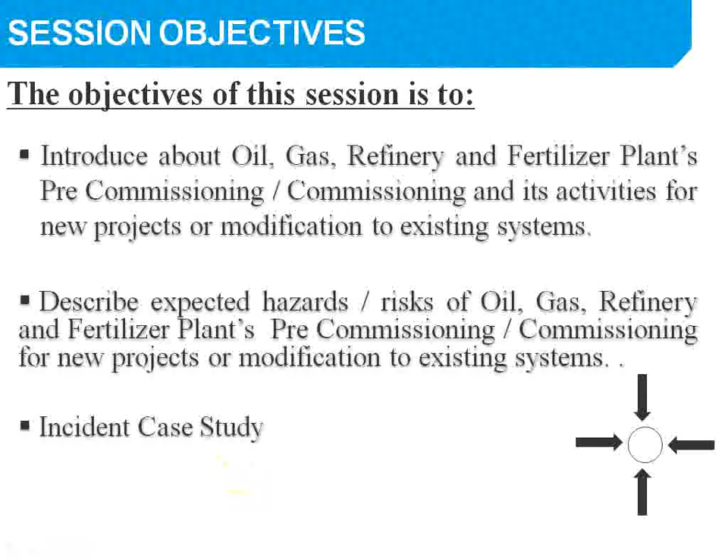As we will see, introduction to pre-commissioning. Definition. Pre-commissioning is the execution of inspection, checks and tests on all individual components within a completed system to verify that they are supplied and installed in accordance with the engineering design, specification and drawings.

Commissioning means those activities immediately following ready for startup, we can say RFSU, including nitrogen purging and operating plant and/or equipment. It covers all activities from ready for commissioning through the initial acceptance.

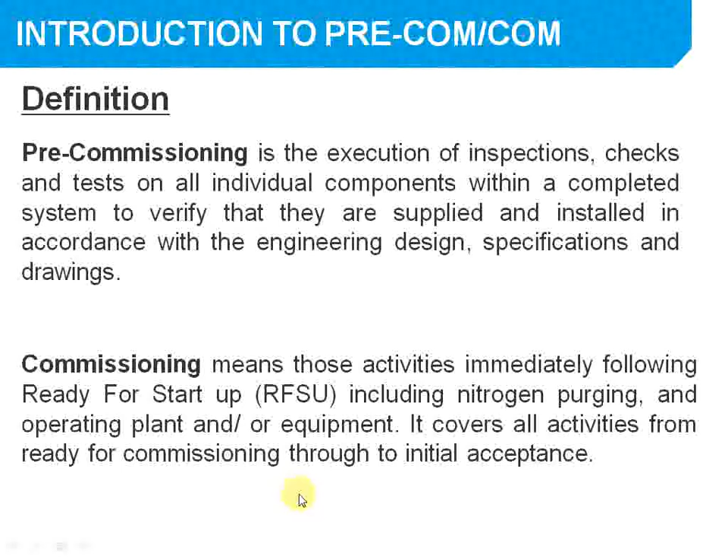Pre-commissioning activities. Pre-commissioning includes all activities required to get ready for commissioning, such as line checking, line flushing, air blowing, water flushing, steam blowing, oil flushing, chemical cleaning, physical cleaning, catalyst loading, loading of vessel internal material, chemical loading, instrument loop test, function test. You can see one picture of line flushing through air blowing, and a second one of line flushing through steam blowing.

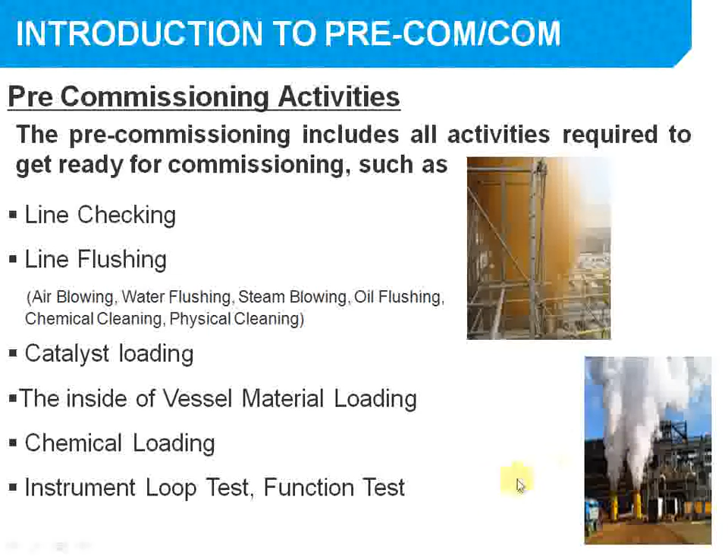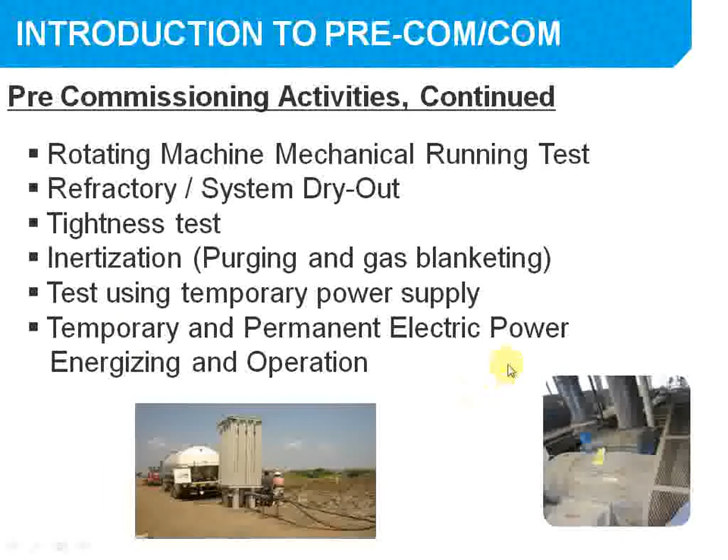Some more pre-commissioning activities. Rotating machine mechanical running test, often people say MRT. Refractory system dry out, tightness test, inertization, purging and gas blanketing. Tests using temporary power supply, temporary and permanent electric power, energizing and operation.

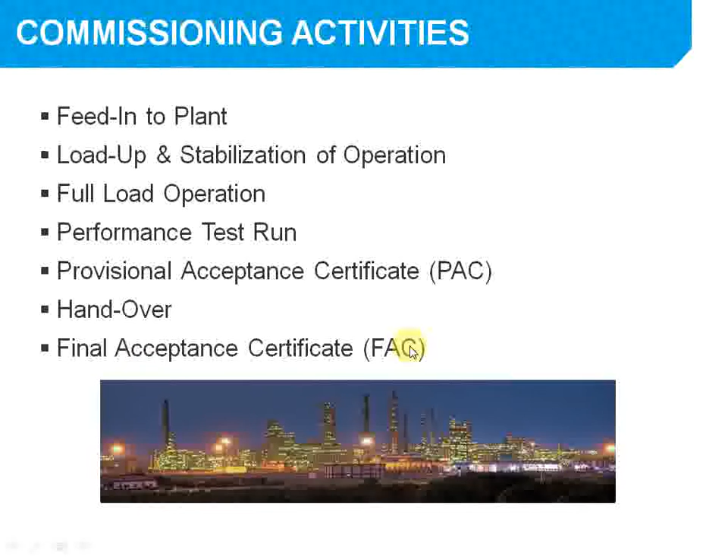Commissioning activities. Feed into plant, load up and stabilization of operation, full load operation, performance test run, provisional acceptance certificate PAC, handover, final acceptance certificate.

Why is pre-commissioning safety important? If we look at hazard and risk, in case any incident happens during commissioning, the consequence could be catastrophic. The nature of pre-commissioning incidents can cause multiple fatalities and huge property damage. Some pre-commissioning and commissioning hazards are high noise level, high temperature, high pressure, high velocity, high voltage, hazardous substances, spills and leaks, or rotating equipment.

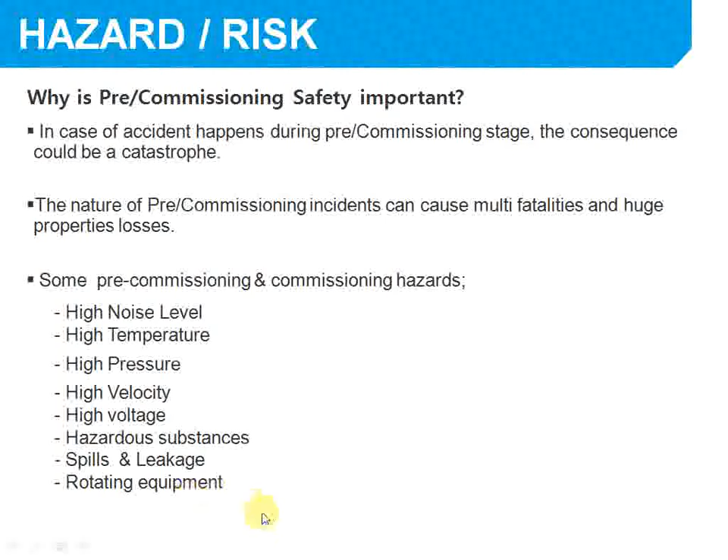If we look at characteristics, the construction phase is static, so obviously hazardous energy will be low for personnel or property. Pre-commissioning is dynamic, hazardous energy medium. Commissioning is dynamic, very high for persons, fire, explosion, chemical or environmental problems.

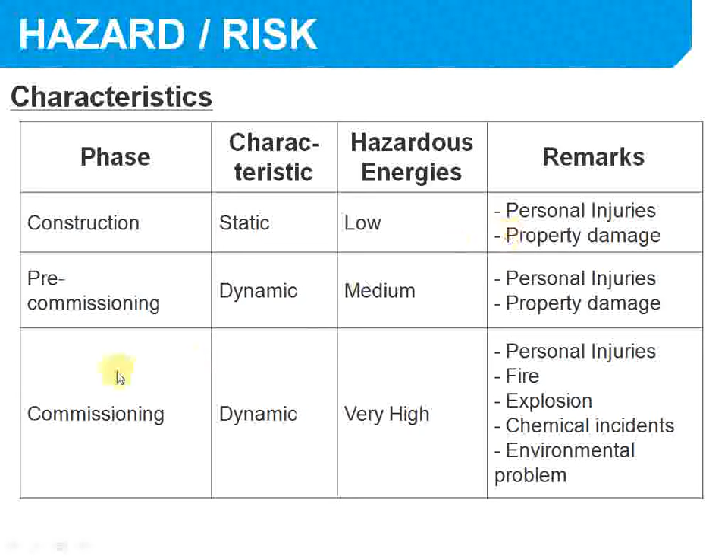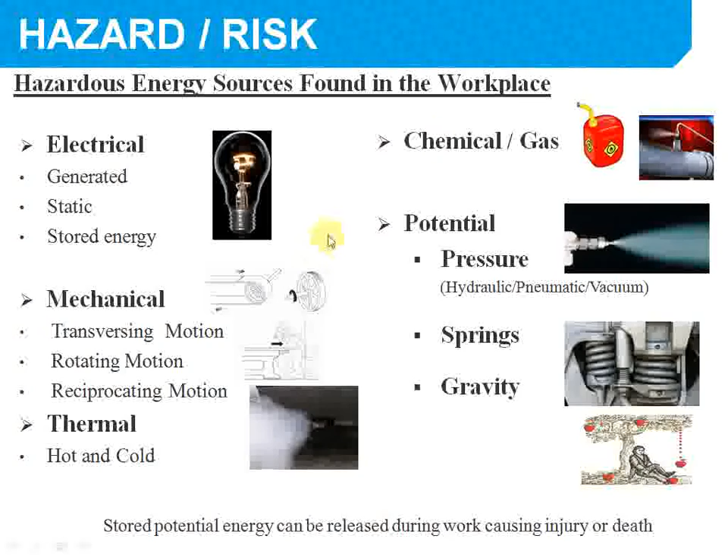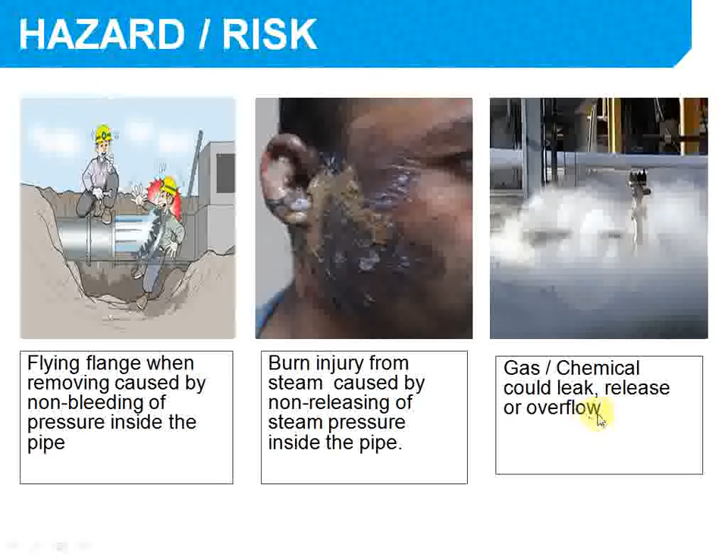You can see these types of incidents due to high velocity or pressure: burn injury from steam caused by not releasing the steam pressure inside the pipe, residual energy, or gas or chemical leaks. Hydraulic, mechanical failure, electrical, or fire and explosion.

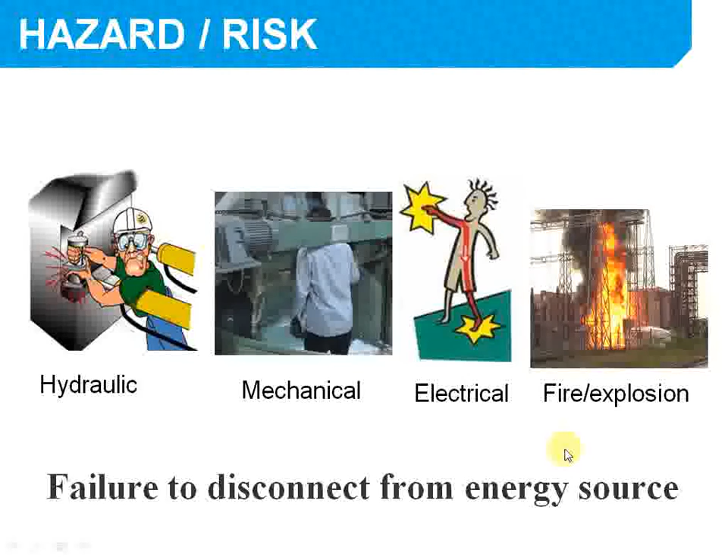Incident case study number 1, gasket failure. A substandard gasket was used, with incorrect installation, and contributing factors for the incident included failure of quality control and commissioning checks to identify the risk. Leak point, damaged gasket.

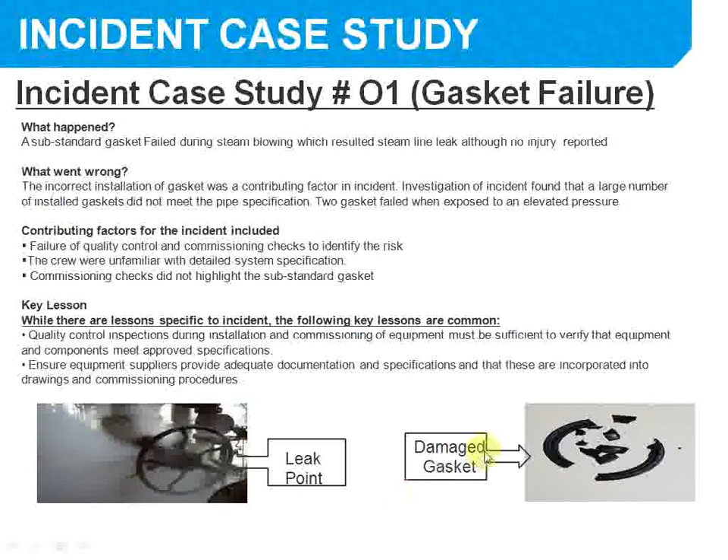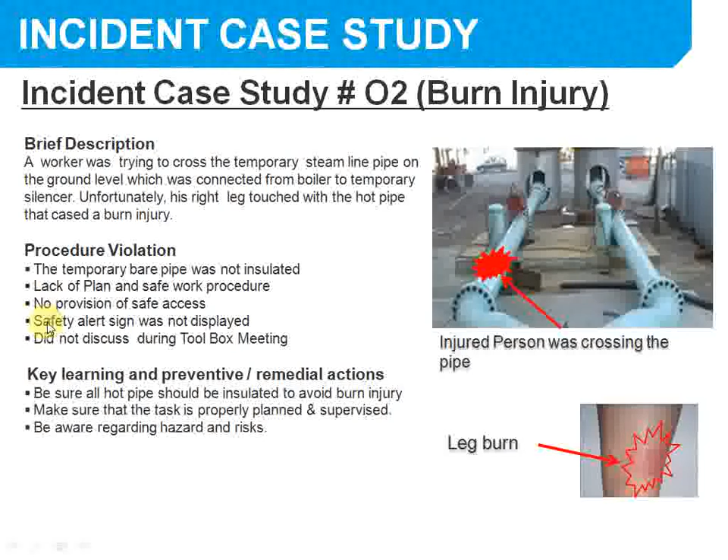This session has covered an introduction to oil, gas, refinery and fertilizer plants pre-commissioning, commissioning and its activities for new projects or modification to existing systems. Expected hazards and risks of oil, gas, refinery and fertilizer plants pre-commissioning and commissioning for new projects or modification to existing systems, and incident case studies.

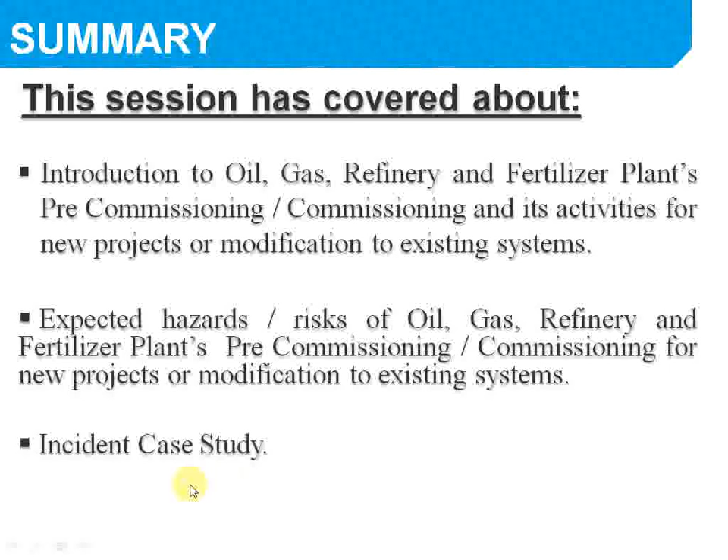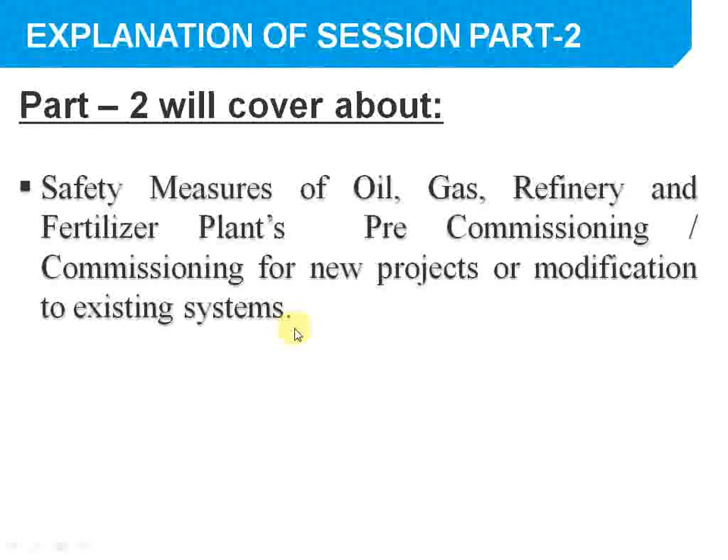Part 2 will cover safety measures of oil, gas, refinery and fertilizer plants pre-commissioning and commissioning for new projects or modification to existing systems. So this is the explanation of session part 2.